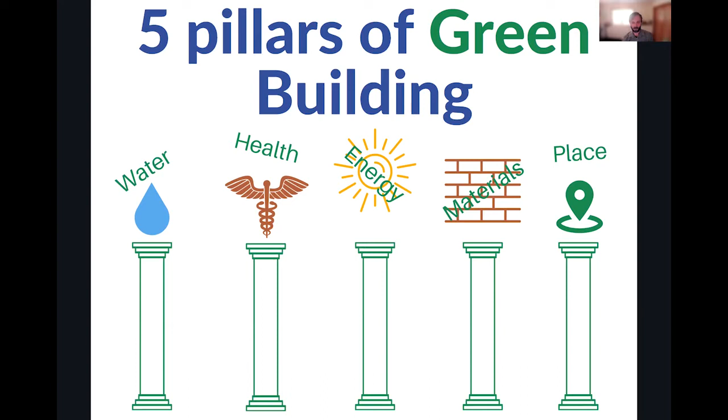So what we like to look at the Green Home Institute is what we call the 5 pillars of green building. All of our homes have these: energy, materials, place, health, and water. All of our homes do better in these areas and can be evaluated in all 5 of these areas and then be improved. For the focus of this competition, our main focus is on the energy pillar, with 2 side focuses on the health and water pillar as well, and ways to win within those.

So as you're going through our program, you'll see these themes emerge. So let's talk about the big one: energy.

That's where you're going to win the $500, right? Reminder: reduce your energy starting July 1 to December 31 compared to the same period in 2021.

If you reduce it the most, you're going to take home a $500 check. So one thing we like to think about for energy is what we call the home energy efficiency pyramid. At the bottom of the pyramid are cheaper, more do-it-yourself friendly options, but also less energy savings and less comfort. At the top of the pyramid, there are more energy savings, however they're more expensive, more costly, take more effort, and are probably less do-it-yourself friendly.

So I want to propose an exercise for you all. Take each of these items: water heater, solar, low-hanging fruit, awareness, understanding, insulate, HVAC, windows, appliances, air seal, and think on your own, take just a minute, and write it into the comment box listed from top to bottom.

At the top, list the bottom of the pyramid: cheaper, less energy efficient, more do-it-yourself friendly, all the way to the bottom: more expensive, but more energy savings. I just want you all to take a guess at what you think the order is, and then we're going to go through and see how right you were. Each one of these items is going to help you win.

Getting a sense of where your energy is being used in your house—there are devices out there you can plug into your electric panel. I highly encourage you all to go get these right now to help you win the challenge. It'll tell you where and when energy is being used in real time, so you can make more informed decisions on how to change it.

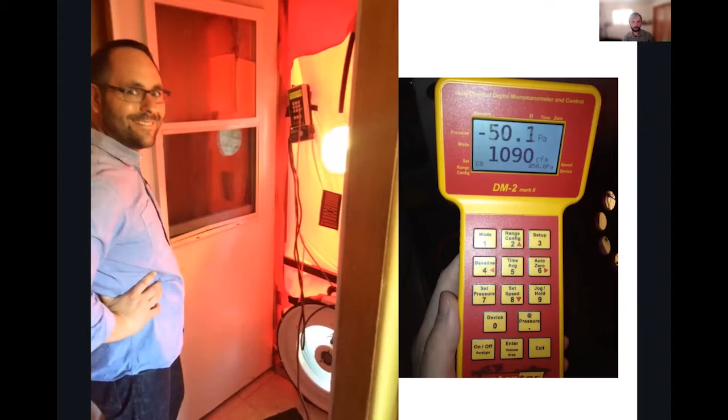Then you want to get an energy audit. Some of you are going to win the audit, some of you are going to pay for it, but let's get an energy audit done. If you're having income challenges, there are potentially free audits from the county, so we'll help you out with that too. Not here to judge or anything like that.

During the audit, someone comes in and does what's called a blower door test. That's a key number, because that blower door test tells you how leaky your home is, which is where a lot of energy is being lost. Plus it ties into rebates and other programs—that's a big component of the blower door test.

Also during the energy audit, the auditor takes a look at all these items and throws it into a home energy score application, which spits out a score from 1 to 10—1 being the worst performing home, 10 being the best performing home in Ann Arbor. Then it will say, if you make these improvements, there'll be a potential 10-year return on investment.

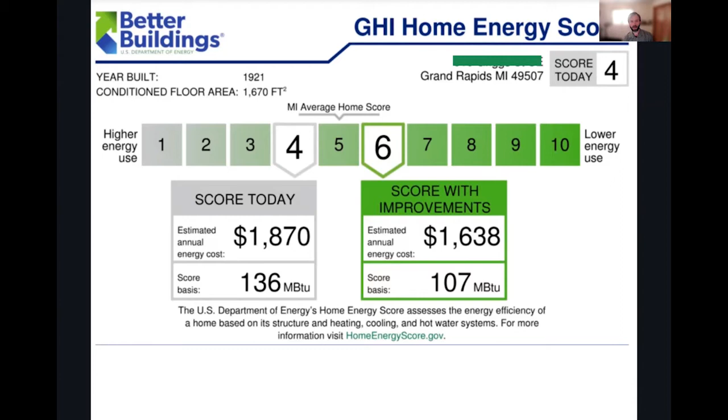You can also use this score to help make a reduction, win the competition, and get an improved score, which can have other benefits like home resale value—another way to win the competition. You'll take a look at some of the items that the Department of Energy's home energy score label will recommend.

It'll tell you when to replace something now, immediately, versus replace it later when it breaks—that won't help you win the competition, but maybe you don't want to spend money on something that still works. Your auditor will work with you on a full list of recommendations on what those improvements are.

You can also do the assessment yourself, though it won't be certified. The Department of Energy recently opened up a do-it-yourself tool, and I'm posting a link. We'll be doing a webinar on how to use that tool and do your own home self-assessment later this year as part of our Race to Zero series. I posted a link so you can go through and use it now to do your own home evaluation.

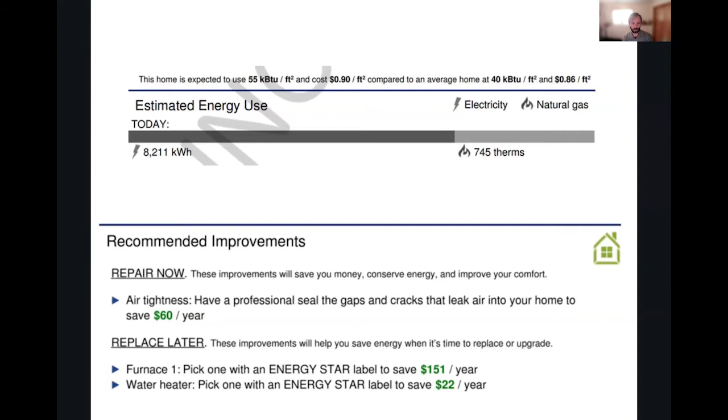Also, when you hire a heating and cooling contractor to improve your HVAC, be sure to tell them they need to use a certified Manual J version 8 heat load calculation, based on the blower door test you received from your home energy auditor. Otherwise, these contractors tend to oversize the heating system, which can be very expensive and doesn't work as efficiently.

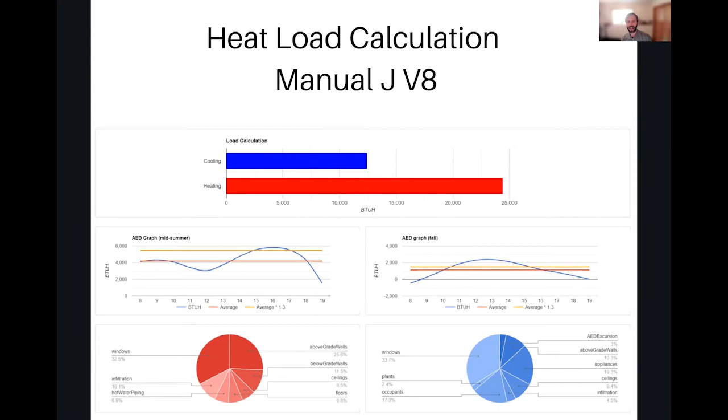So that's part of the awareness section. What did I miss? What are some other ways people can make themselves aware, that you could share with your fellow Ann Arbor residents? Or what questions do you have for me on the awareness section before we move further up the pyramid?

So there was one guest who shared that your library has cameras and sensors, and we're looking at potential indoor air quality sensors to get into libraries that you can all check out. There are some libraries, like in California, where you can rent cooking equipment. Who knows if we'll get to that, but we'll see other ways you can make your home more energy efficient.

Okay, so we're moving up the pyramid here. Here again are all the different items on it. What do you all think is the next one on our list?

Yes, low-hanging fruit. It's right there, right? So easy stuff: go and change your light bulbs. If you don't have all LEDs right now, you're wasting a lot of money. This is super do-it-yourself friendly, though sometimes depending on where your lights are there might be tall ladders you need to get to, and I understand the concern there, but get switched over to LEDs right now. If you don't have all LEDs, just leave this presentation now and go get them switched. You'll make a huge reduction.

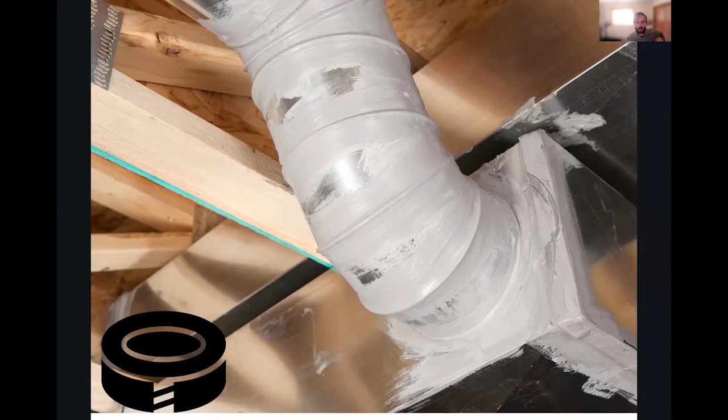Get downstairs and go take a look at your ducts. Do they look like this duct? Are they sealed? Do they have tape around them? If they don't, go get some metal sheet tape - not duct tape, you don't want to use duct tape, but tape that's for ducts - and wrap everything you can see all the way across the top. Sure, you can hire someone to do it, but if you feel comfortable, you can just wrap all the edges, or you can use mastic if you want. It will have a little off-gassing, maybe make you a little nauseous, not the healthiest to breathe, but it does seal a lot better than the tape as well.

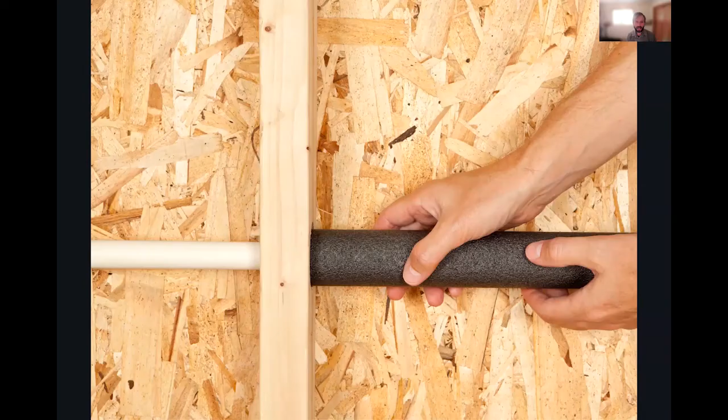Now get downstairs and make sure you have R4 pipe wrap around all your hot water pipes - wrap it and seal it as much as you can. I would put it around your cold water pipes too, if your basement's not conditioned. That's actually more for health and durability reasons, not for energy efficiency per se.

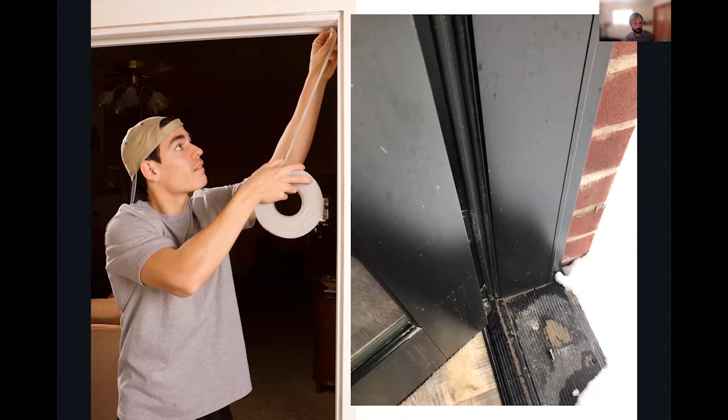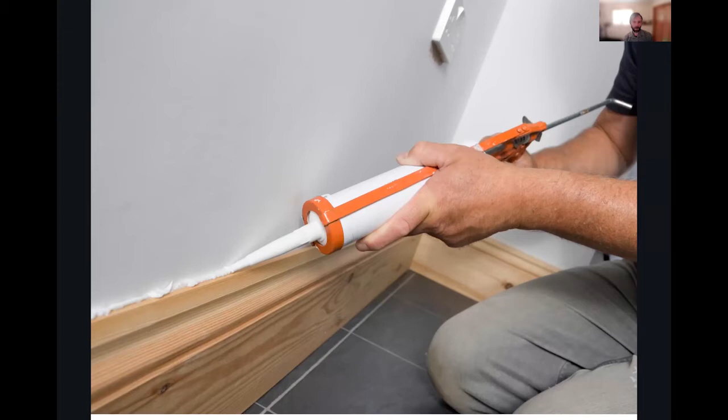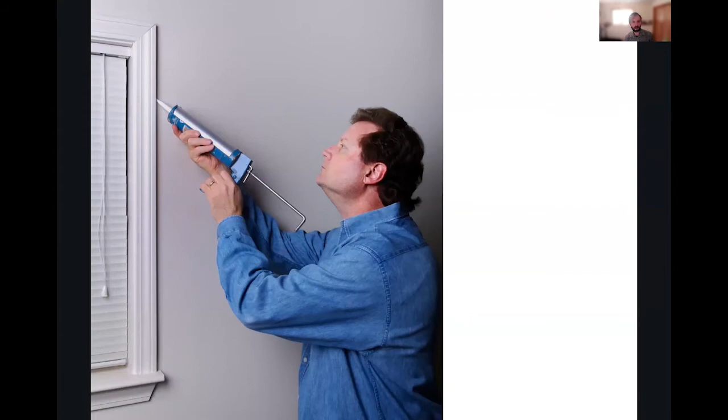Make sure you go in and weather strip all your doors and windows. Go pick up some weather stripping and check that it's still working, and get those repaired if not. Grab a caulk gun and start caulking all your baseboards. It's easier if you can pop the baseboard off and caulk at the bottom of the floor, but I understand that can be a pain, so you may not want to do that - you can just caulk on the top and the bottom. Same goes for all your windows - just caulk all the way around your windows while you're at it.

Get that in there. Light switches are notorious for leaking air, and they're a safety issue too, of course, for kids. So there are these cool light switches now where you can get them pre-sealed on the inside. If you've ever felt in older homes in the middle of winter, put your hand up near the power plug outlet - that is.

You'll feel cold air just blowing in like crazy, so make sure that's all sealed. They sell those, and make sure you don't just seal that part because it's actually blowing around the edges too. You got to seal it all.

Power strips, put everything on power strips and shut them off when you're not using them. I've had someone tell me they saved $70 a month by doing that. I assume they had a very high bill to start, maybe a million things plugged in. But also, one way to both reduce your exposure to electromagnetic frequencies as well as save energy is

to have a kill switch. The kill switch, you shut it off and it knocks the power out in the entire room. So you go to bed and just knock your entire entertainment center power off, shut the power off in your room if you don't use any power in there at night. It's just another way to cut some of that vampire power being used.

Then also try to keep the sun out from overheating your house as much as you can. So obviously you want to use blinds that are reflective. This is a little bit of a higher level, but you can get a white roof, a metal white roof, or if you're rebuilding your house, build it out so that it's keeping the sun from coming in the window and overheating the house.

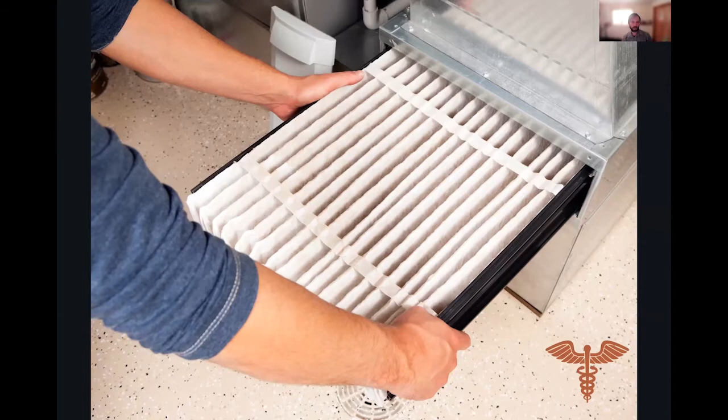Lastly, there's actually funding from DTE to do a test and tune-up of your furnace. It could include a filter change, making sure it's running properly. So if you're not getting a new one, have your HVAC contractor come in and they may pay for some of that to be done. It can just make sure your system is running more efficiently, and that can also improve the health and comfort in your house as well.

So before we move on to the next section, there's many other items for low-hanging fruit. I didn't cover them all here today. What are some things that you do or are planning to do in your house to save energy and win the competition? Or what questions do you have for me on some of the things we discussed for low-hanging fruit?

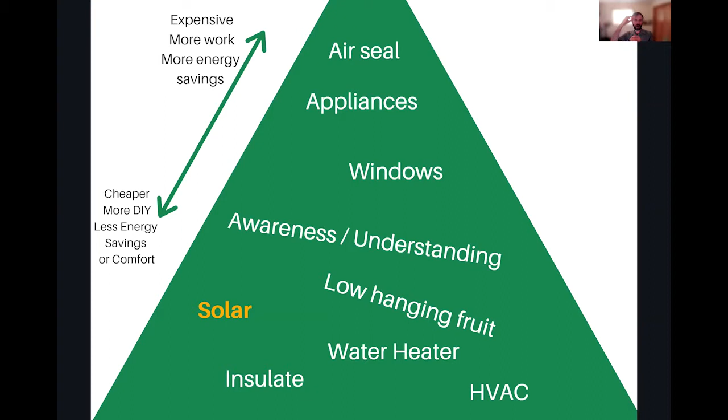All right, so coming up next on our list, again, we've got at the bottom awareness, education. Next up, low-hanging fruit. What's the third item we're going to be looking at that you had written down?

Anyway, what we have up next is appliances. And quite frankly, appliances—if you're not planning to replace them and you have ones you like, then this may not be high up on your list. But just from a pecking order, they're pretty easy to swap out, and a lot of the places will deliver those and install them.

So obviously you want to go after Energy Star certified. And if you go to the Energy Star website and you're a nerd like me, you can dig through it deeper and even find ones that are more energy efficient than the standard Energy Star label, just based on the efficiency of the appliance. So just make sure all of your appliances are certified Energy Star. If you want to be really aggressive when buying a new one, make sure they're at the tier 2 or tier 3 levels, since those save even more energy.

Right, so anytime you can get a new fridge, make sure of two things: have the freezer either on the top or the bottom, and get rid of the ice maker. Both of those things matter—when you have side-by-side fridges, they use more energy, and when you have ice makers, they tend to freeze up and leak anyway, using more energy doing all that. So if you're trying to be efficient, get the top-to-bottom style.

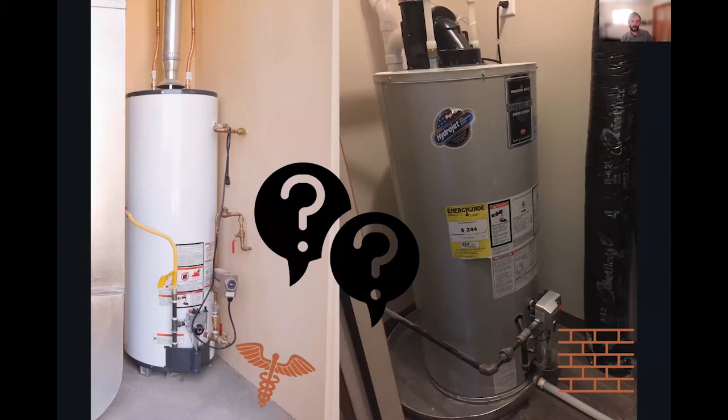Okay, so here's the challenge for you all. On the left side or right side, which is the most energy efficient water heater, and why? And bonus question, which one of these is going to be healthier? And then also a second bonus question, increase durability of materials, which we call the material section, the durability of your house. What do you all see there? And what are your thoughts? Left side better or right side better, and why?

Yeah, so on the left side, what you have is a naturally drafting gas water heater. And you can see that a little bit because you can see the gap there, which is a health issue, right? That could be pulling carbon monoxide and humidity up into your house. That's a health problem, but it's also showing that the unit itself is less energy efficient. So go down and look at your water heater after this webinar, and if you see that gap, you know it's time to update.

So what are the choices? Here on the right, you've got a sealed combustion water heater, probably Energy Star certified. It's just drafting that right out the window. And also this one's most likely going up a chimney, which is also inefficient. And those chimneys end up leaking when you've got a high snow load. It damages the chimney and causes leak repairs and mold issues. So there's a lot of wins by getting rid of the chimney and using a sealed combustion water heater that's Energy Star certified.

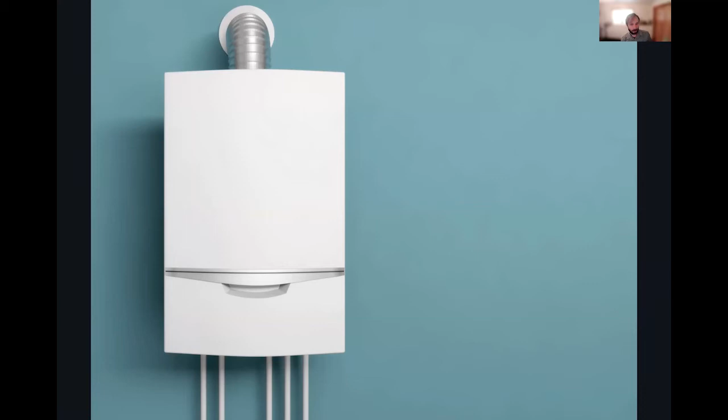You could also consider switching to a tankless water heater, but let me tell you a couple things about tankless. They're very expensive, hard to retrofit, can be very expensive. And water heating in general saves minimal energy to begin with, so it's a very big expense. Plus they have maintenance and upkeep, but it will be more energy efficient. I think 10 years ago tankless water heaters were the green dream, but I think they're definitely on their way out.

So what is the future? Well, the future of water heating to be the most efficient is to go all electric. And going all electric does come with health benefits, again, you don't have those emissions coming straight out of the water heater. But electricity is very expensive right now, even with prices going up and inflation of gas, which has gone up I think 300%, electricity is still pretty expensive. So just going straight to an electric water heater could be costly.

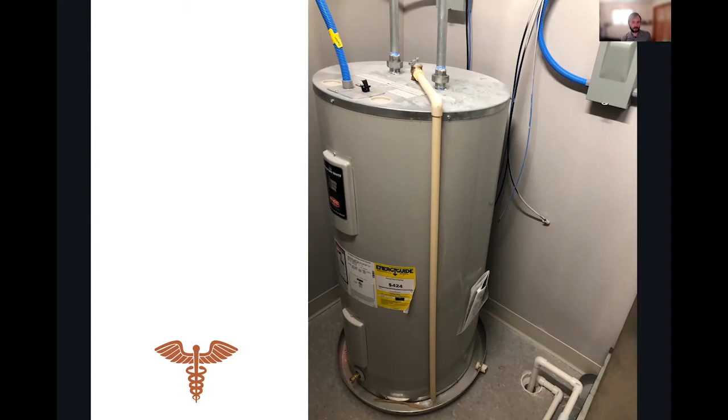And that's why they make things like heat pump water heaters, and I have one of these. What these do is they pull heat out of the air. And I can tell you there's even heat in your house in the middle of winter. It uses a refrigerant, kind of like an air conditioner or your refrigerator, to heat that water up to roughly even 400% energy efficiency. And it just makes for a much more energy efficient situation.

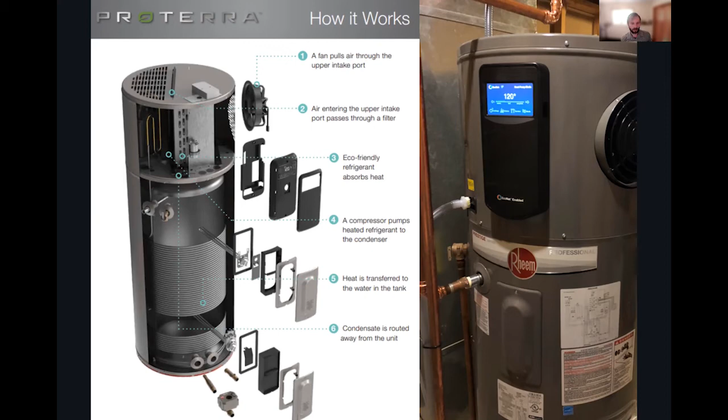So there's a quick video here about a really cool brand that we like. Let me know if you all can't hear that.

Introducing the new Rheem hybrid electric water heater.

Can you guys hear that?

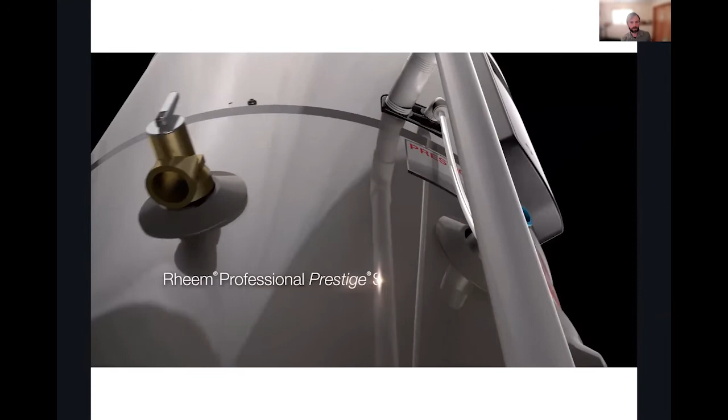Factor of 3.5. This is the smartest and most efficient water heater on the market today. It's the quietest hybrid on the market at 49 decibels. Plus, our newest hybrid design is EcoNet enabled, providing Wi-Fi connected control both at home and away.

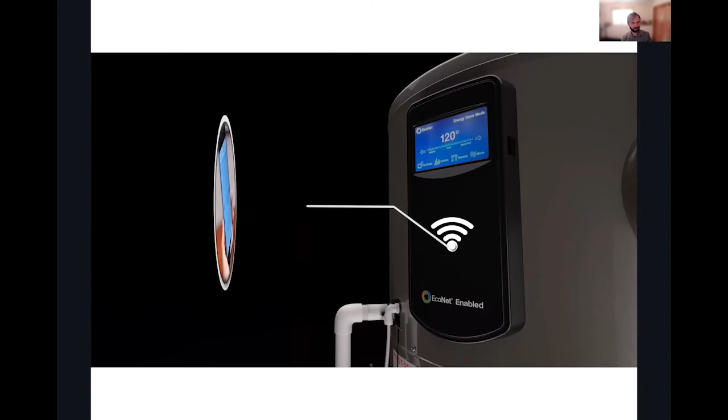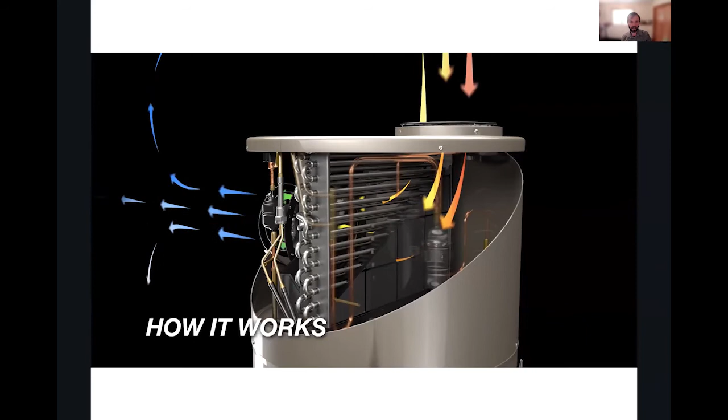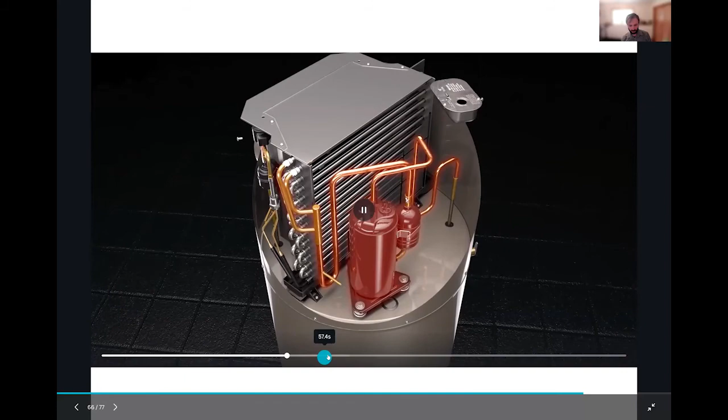Here's how it works. A fan pulls in heat from the outside air, and it's using it to heat the water at super high energy efficiency. Then, from there, it's putting it through a refrigerant cycle to heat the water.

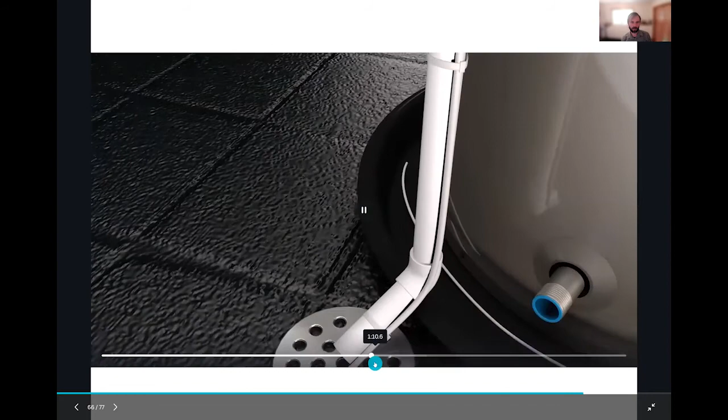So that's heating the tank. It's wrapped around the tank there. And then there is a condensation line just to make sure that when it's pulling that heat out of the air, water comes with it. So you've got to make sure to drain that out. It's a little bit different than other water heaters like that.

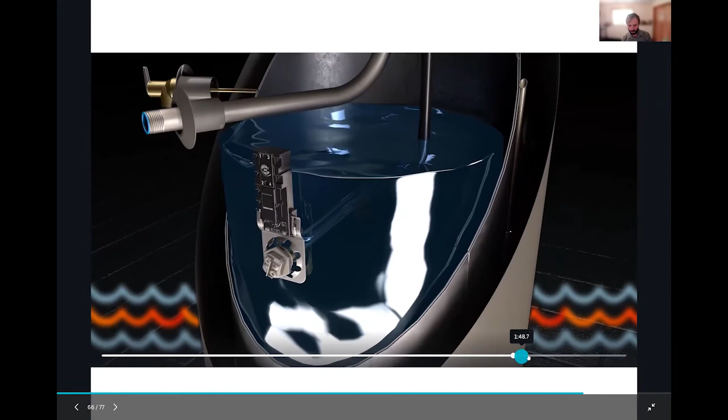So it's a pretty cool product, and there's a lot of different brands. There's even one made right here in Michigan that can do that.

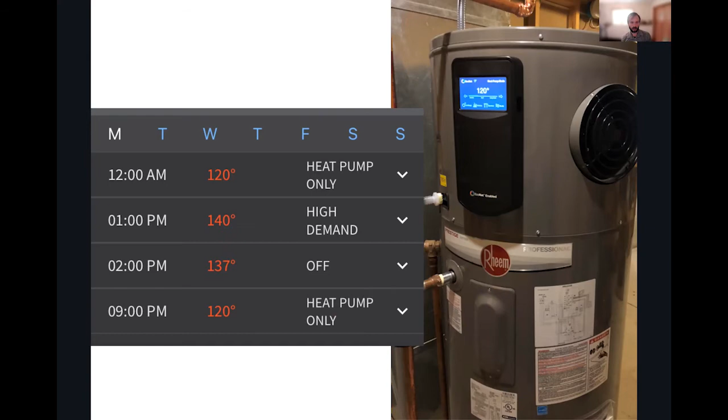Another thing about these devices is that some of these come with time of use settings right away. So you can actually set your water heater to not heat when electricity rates are higher, and only to heat when electricity rates are lower. In that way, it actually makes your water heater kind of act like a battery. There's utility programs around the country that are using water heaters like batteries to help reduce the load on the grid.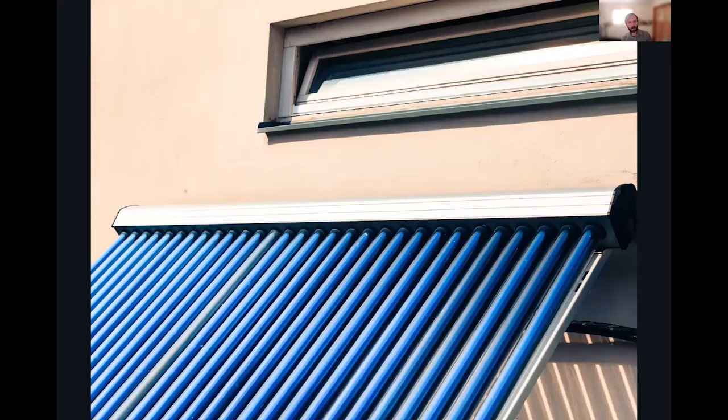Some people ask about solar hot water, and it's really something that's on its way out. It's pretty much a way of heating water that's kind of gone. Part of the reason is because if you overgenerate solar hot water, you have a problem on your hands with all this extra hot water you need to do something with. Plus, there's all the plumbing and other mess with that. So we just don't even see anyone doing that anymore, but wanted to give you a heads up.

So like I said, another way to win this competition is to reduce water usage. By reducing water usage, in many ways you're going to reduce energy usage in many of the applications tied directly to the water heater. So it's a 2-for-1 if you really think about it. And there's an extra way to win.

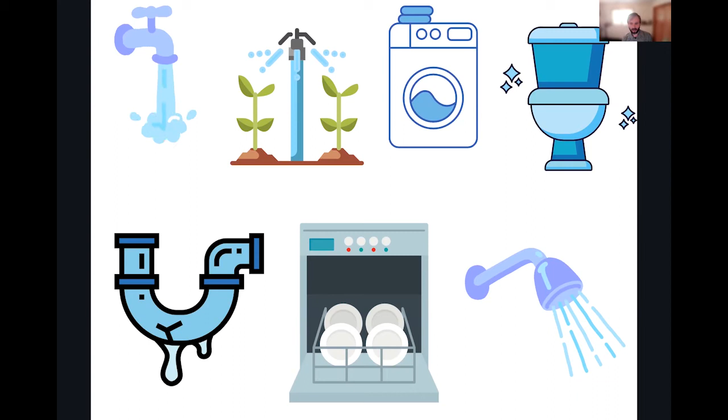We've got all these different applications in a home, and I was going to do a little challenge, but we're running short on time. So I'm just going to tell you, toilets are the number one water users completely. It's just a simple flush, you don't even think about it, but it uses so much water. Imagine if we could cut our water usage down to like 0.8 gallons per flush, even 0.5 gallons per flush. That's what I have. The average is 1.6 gallons, low flow is called 1.28. But imagine if we could go even lower and put less strain on the city municipal water system.

That doesn't save you any energy, but it sure saves a lot of water. And water bills are only going up so fast, exponentially, in cities. So let's save water, just to save you some money.

Next up is shower heads. You want to get those down to 1.25 gallons per minute to be aggressive. I have one, can't even tell the difference, as long as your water pressure is good, feels great. Bathroom aerators, you want to get those down to 0.5 gallons per minute. Again, that'll save water, and both of these will save on hot energy and water.

Then next up is your clothes washer, for how much water is being used. So switch again to Energy Star front load.

Leaks: when your assessor's out doing your evaluation, make sure they assess your house for water leakage. An easy way to do that is to turn off your water at the spigot where it's coming into the house from the municipality, then don't use any water for about a half hour to an hour, and see if it moves. If it does, you might have a leak.

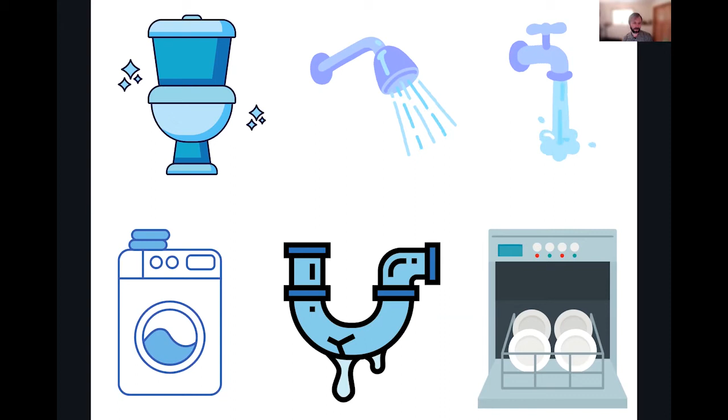That's a very debatable thing, but again, this won't save any energy. If we can transform our yard into drought tolerant native adaptive grasses, they make grasses that look just like your average lawn. I've seen it with my own eyes in Illinois, it's called Black Beauty grass, I believe. This grass only needs to be mowed maybe once or twice a summer and barely uses any water once it's established. Buffalo grass, Zoysia grass are other options. For your plantings, make sure you're using native adaptive plantings that are drought tolerant, and get rid of the irrigation. That's another way you can cut your water use and help win the competition.

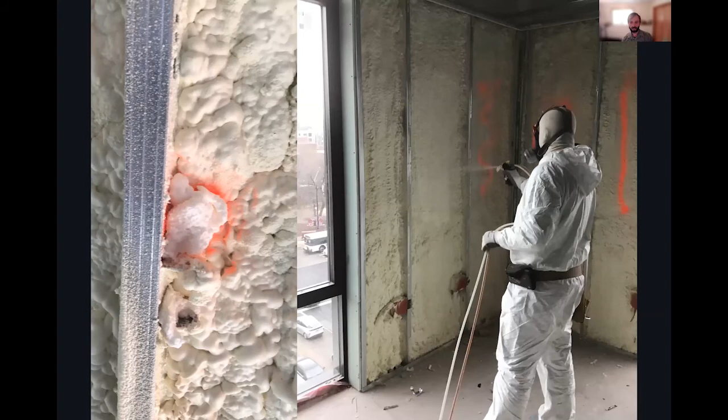I'm going to skip the questions for water because we've got a lot to cover in a short time, and get into the next session, which I'm going to pull up on another screen. Any guesses on what that might be?

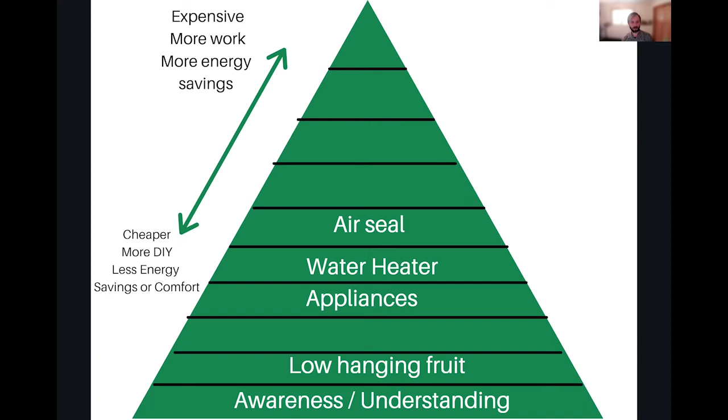Air sealing, yep, you got it right. So that's going to be next. This really goes hand in hand with insulation. They can be hard to separate, but sometimes you need to do one without the other. We have all these areas in our home from top to bottom where air is going to enter in, and it's going to waste tons of energy and, most importantly, make you feel very uncomfortable.

Some of the areas you'll probably be able to access that are more affordable is what we call the rim band joist, where the basement comes together with the first floor, and you'll be able to go down in your basement and see it. The attic is usually going to be much more accessible. The walls are going to be very difficult to get to unless you're planning a more deep renovation and retrofit.

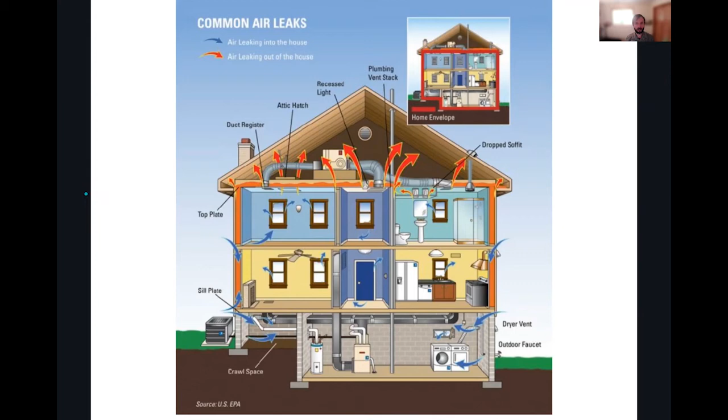So again, you can go out and get the caulk gun and go around and caulk air leaks. When your auditor comes and does blower door testing, they should hopefully flag for you where this leakage is happening. And then you can hire someone like Eco Intelligence to come through and do that air sealing for you.

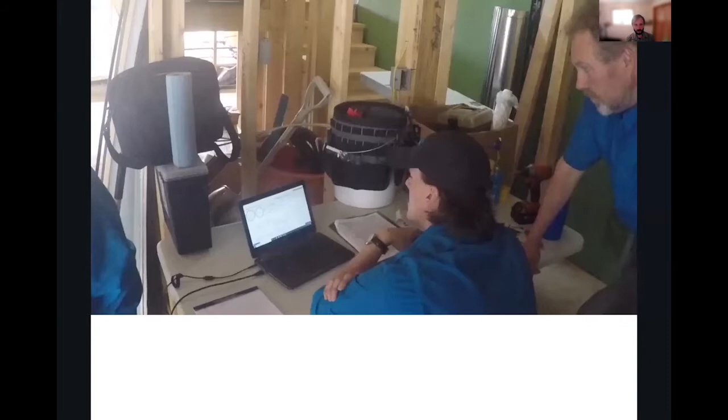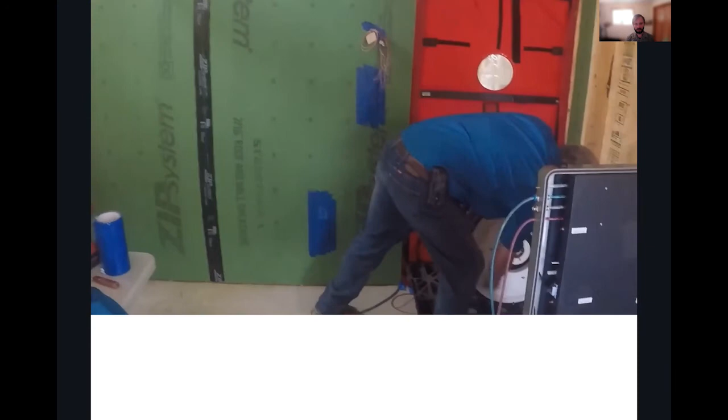If you really want to go to a higher level, here's an Ann Arbor net zero home where they're actually going in and doing a sealant in the house that goes through and air seals the entire house. While they're doing it, they're using a blower door test to see how efficient their air sealing is. This is a new construction home. They set up this sealant and it's blowing air seal all over the place.

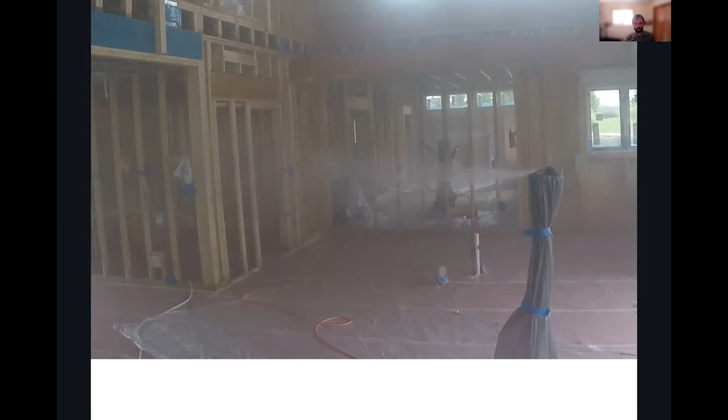But you can do this to existing homes too. You're just going to need to get your furniture moved out of each room and then tape everything down. But if you really want to be aggressive on air sealing, this is the way to do it. We don't see too many people do it on existing homes because it's very messy. But again, if you want to be aggressive and you want to win, you might want to do this.

We have a whole webinar on this, a two-part series called Sealing the Deal, Innovations in Air Sealing, and you can check that out over on our YouTube channel. Any questions or thoughts there on air sealing in general?

Typically, like I said, it goes hand in hand with insulation, so we're going to talk about it later when we get to insulation. And I appreciate you saying that. If you've got can lights up in your attic and they're penetrating into the attic, that is a huge leaky spot. So the first thing is never install can lights, that's number one. If they are there, get rid of them, that's number two. If you like them and you're not going to get rid of them, they can be sealed. I believe Amanda's team can help out with that too. There are ways to seal them or do them properly if you like them up there. That is a huge area for leaks and water leaks and all that other stuff. So I'm glad you brought that up, thanks - that's one I forgot to mention.

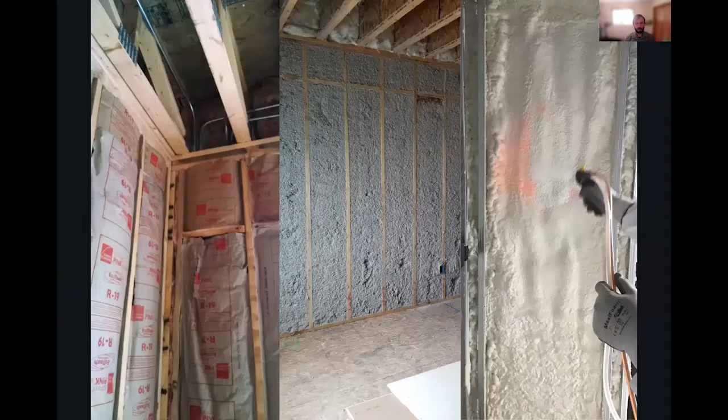All right, so what's next on our list here after air sealing?

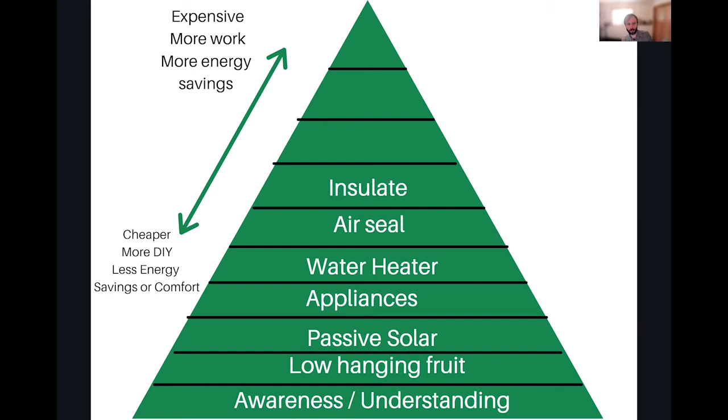So insulation, and again, this goes hand in hand with air sealing, but typically is a lot more expensive and a little more labor. You have all these sections around your house that you can insulate.

Right now, you can go down into your basement, look down, and see your rim band joist, and see where the basement touches the floor, if it's insulated or not, and get a sense if you need help. You might have a unique situation with your attic, which can make insulation more challenging. But you can poke your head up into your attic, get a measuring stick out, and see what kind of insulation is up there, and how thick it is.

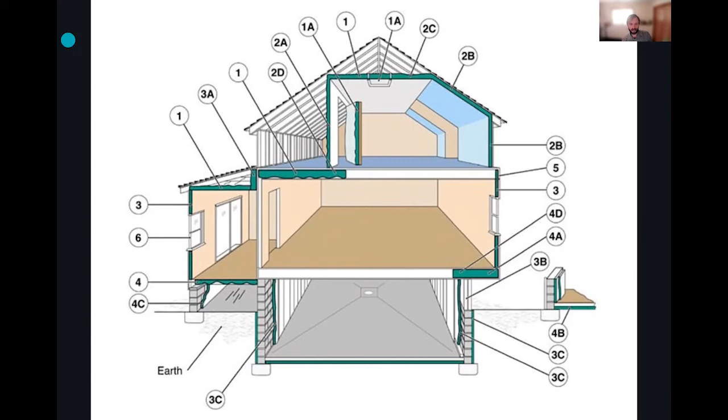What you're looking for is either fiberglass, the pink fluffy stuff, or the gray fluffy stuff, which is cellulose, or spray foam. These are a good, better, best from our value. On the left, fiberglass is the least effective insulation, especially in a batt form like this. Very ineffective, very leaky. You probably have it in your walls.

Cellulose is your second best. From a resistance to heat loss standpoint, it does a pretty good job. And typically, if it's blown in nicely like this, it air seals a little bit better. Foam, on the other hand, is going to be your best air sealant, your most effective resistance to heat loss, and it has potential opportunities to block moisture, though it also has potential opportunities to cause moisture damage. So it can go either way.

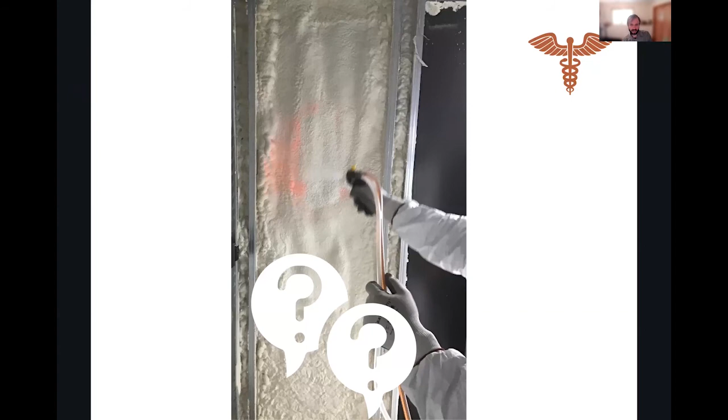One thing we do get concerned about—remember, you can win this competition by having better indoor air quality in your home—is off-gassing from foam. Foam, at the end of the day, is a petrochemical made out of oil, and it can off-gas. There are some studies showing that, especially if it's installed poorly, it could cause potential negative air quality. Could that cause health issues? We just don't know. So from a health standpoint, blown-in fiberglass is actually your healthiest insulation, especially if it's certified.

We want to do this session because we want you to consider both health and energy efficiency when you're doing your project, and make sure you're thinking through all the applications.

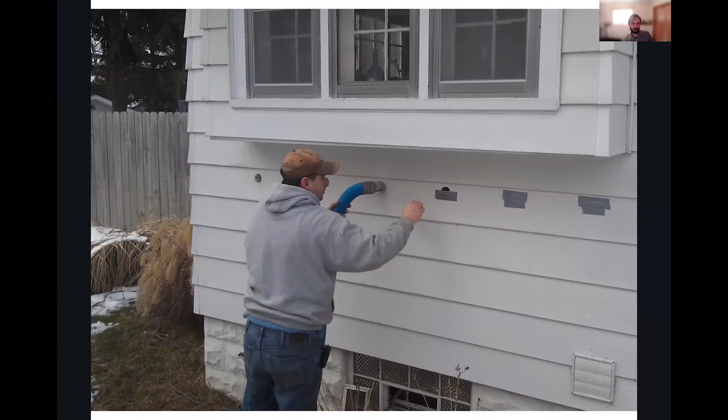If you have an existing home, there's something called a drill and fill method. If the walls are empty, you can blow in cellulose. Some people pour in place foam into the walls. This can cause potential durability issues if the home has poor water leakage management at the top, which can cause other problems. So just be careful that you've taken care of the water issues around your house, so they don't get in and rot the blown-in cellulose if you decide to take this method.

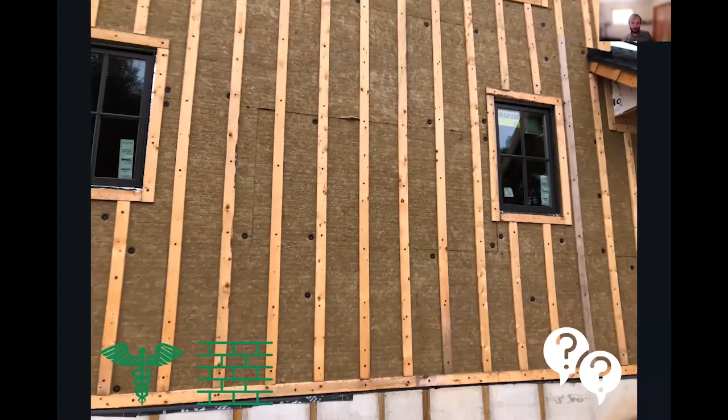A very energy efficient strategy would be to remove the exterior siding and put on something like a rigid foam or rigid rock wool that wraps around the house. This can be an air barrier to some extent if done right, and it can keep a lot of the heat in. Plus, the studs in your house that hold it up waste a lot of energy, so this helps block that wasted energy within the studs. Very expensive to do, but if you want to be a winner, this is a great opportunity to win, save energy, and make your home more durable in the long run.

So before we move on to the next section, are there any questions on this one?

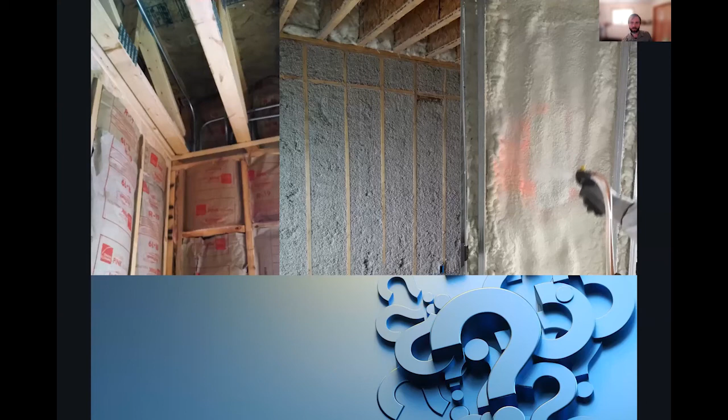All right, so the next one is just being given away because I forgot to put the question in there. But heating, cooling, ventilation—this is one where you might say, Brett, my air conditioning is failing, my heating system is failing. If that's the case, then this is going to be at the top of your list. You still want to get the energy audit done before you replace your heating system. Definitely don't want to do the wrong one. But this may be your top priority.

Quite frankly, if we can take our systems all electric, we can actually save a lot of energy right out of the gate, just by switching to electricity and using heat pump systems, which we'll talk briefly about. So in fairness to you, you should do all these other things first, but they can be overwhelming and costly with prices going up. You might have a failing HVAC system where that is your priority, and I get that.

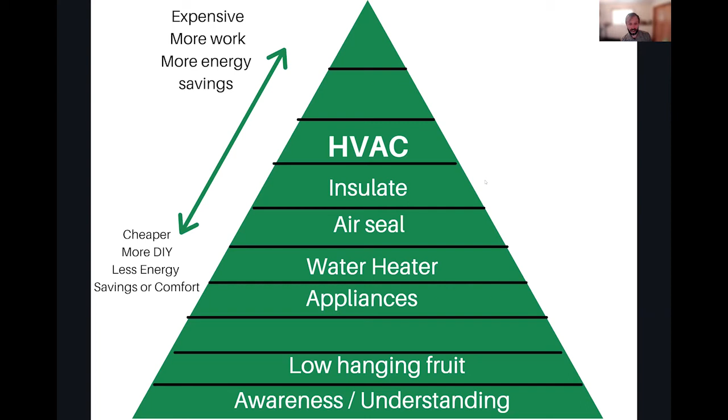When people tell me, 'Oh, I got a new furnace, it runs all the time, it's so inefficient'—no. If your furnace turns on, fires up, turns off, cycles over and over, you hear that in the winter real loud and then it's off, that's bad, very inefficient. You don't want that. You want it running 100% all the time, constantly, as much as you can. That means it's properly sized and right sized.

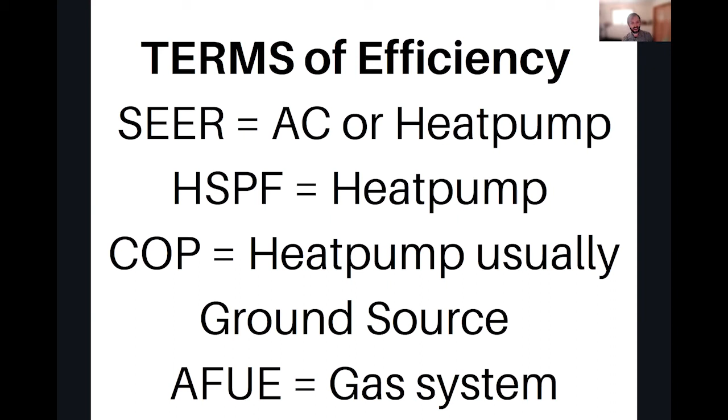Here's some terms to look at that you might hear me say. SEER, which is an AC or heat pump rating. HSPF is a heat pump rating. COP is a heat pump rating, usually used for geothermal. And then AFUE is a gas system rating.

For air conditioning, you want your air conditioning to have the highest SEER rating it possibly can, and you want it to be right sized, because that also helps draw humidity outside of your house, which can cause all sorts of health issues and mold issues.

Now, if you have a gas furnace that you really like and don't want to switch to an electric heat pump, that's fine. There are new products, like from our friends at Mitsubishi, where you can use a heat pump just like an outdoor air conditioning system, and plug it into your existing gas furnace. What it does is act as air conditioning in the summer, and in the wintertime it pulls heat out of the air until the air gets too cold, and then your gas system fires up from there.

We have a whole webinar on these ideas you can check out on our website called 'Heat Pumps and Gas: Cold Climate Hybrid Systems Are Here.' And if you want to go all heat pump systems, that's the best way to go—just make sure it's a cold weather climate certified heat pump system, which we can get you more information on.

Now, the most energy efficient system you'll ever find is ground source heat pumps. That's a geothermal system where they drill wells. There are a lot of challenges, especially in Ann Arbor we've heard, where you're not allowed to drill wells next to certain lot lines, so there can be difficulty just being allowed to drill these wells. But if you can do it, that's going to be the most energy efficient system you have.

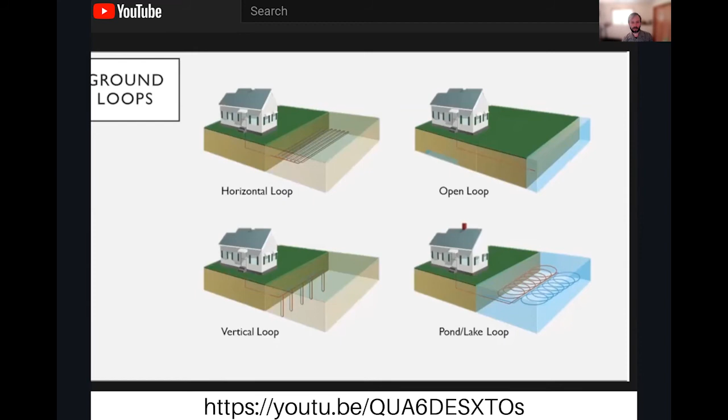One thing we're all jealous of over here is that DTE actually has a special geothermal rate just for you, to charge less for electricity for your geothermal usage. So you get a bit of a head start by using geothermal and going through that special rate.

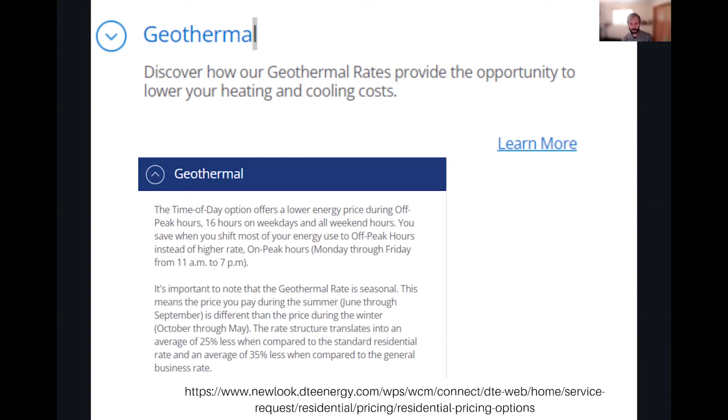I'm going to skip a couple things here to get into the air quality section before we wrap up. One of the ways you can win this competition is to improve the air quality of your home, and that's closely tied to your HVAC systems.

So what you're going to do is get a device, an air quality sensing device—we'll have more information, maybe even a sponsor who gives them out—and put this device in your house for at least two weeks. If you want to own one, we recommend you just own one. Think of it like a smoke detector or carbon monoxide detector, but instead it's constantly monitoring air quality. Usually it's not bad enough to tell you to evacuate like smoke or carbon monoxide, but it's constantly monitoring air quality in your home and telling you over time what kind of pollution you're being exposed to, so you can think about what you should do to remove it.

So these air quality sensors are measuring things like radon, which is a problem in Ann Arbor — you're in a high radon zone, and that's linked to lung cancer. Also VOCs, volatile organic compounds, and CO2, which is a problem, especially if you work from home. If it's really high, you're tired, groggy, not getting work done, and the flip side is you don't sleep well when CO2 is high. It's measuring humidity, temperature, pressure, and PM 2.5, which comes from gas stoves and can cause asthma, allergies, and also comes from wildfire smoke. Every time there's more fires out in California, that's getting sucked into your house. So it's measuring all this stuff.

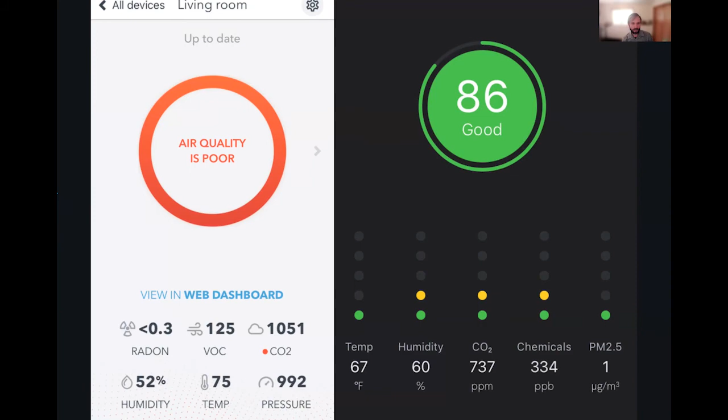Now, what can be done to improve air quality? Well first, I want you all to go do the toilet paper test on your bath fan. Hold up a piece of toilet paper and put it on your bath fan — does it hold the piece of toilet paper? That's telling you your bath fan is probably functioning pretty good, and that's a good sign that you've got good air movement. So then you can just flip your bath fan on and leave it running all the time, and it's going to get good airflow in your house as a quick, cheap way until you can do further things.

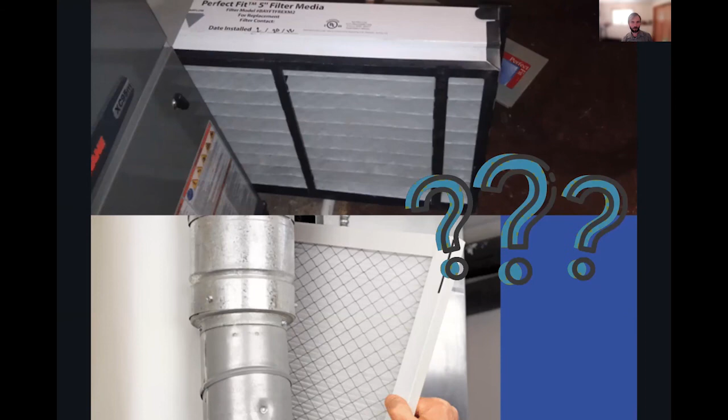The next thing you want to do is get a good MERV filter, at least MERV 8, but you can upgrade to MERV 13 if you want to filter out some of that PM 2.5. It even starts filtering out potential airborne viruses and all that. But you've got to be careful when you upgrade your MERV filter, because a too-thick MERV filter can damage older HVAC systems, so you want to work with your HVAC contractor.

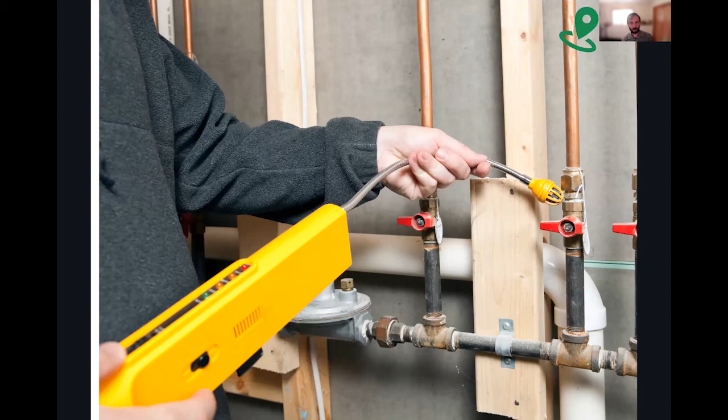Again, you want to do gas leak inspections in your house. We find gas leaks all over homes we inspect, even on brand new HVAC systems — they're leaking all over. And the gas stoves are leaking all sorts of nasty stuff that you don't even see, causing all sorts of problems.

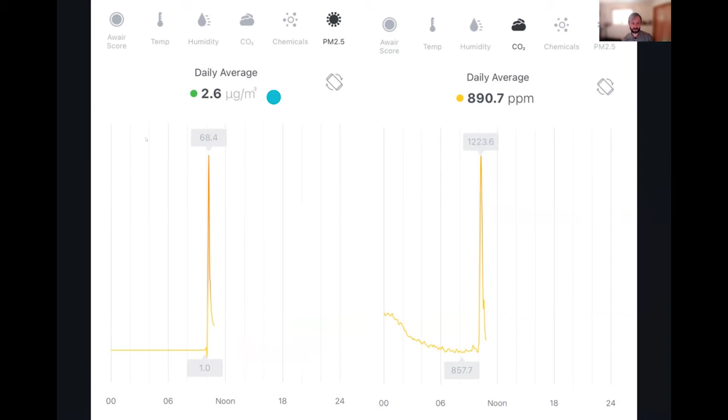Here's one of the people we work with — you can see when they turn their gas stove on, on the left there, their PM 2.5 fires up. Remember, that's asthma, childhood asthma, and all sorts of other cardiovascular diseases. Then it also fires up CO2 — real nasty stuff coming out of there. And their gas stove is in good working order.

So again, you want to switch to electric and induction to have a healthier home. And then next, you want to make sure your home has a hood range, and that the hood range is venting outside. Very important to make sure you've got good air quality within your house.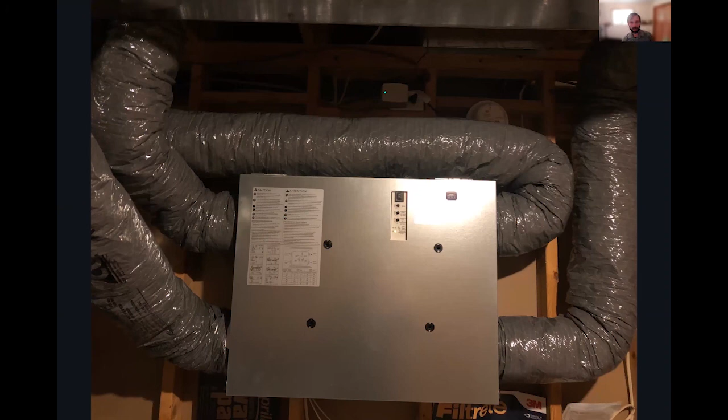Some other strategies to make your house more healthy: putting in an energy recovery ventilator, making sure fresh air is coming in, dirty air is going out, and it's doing it in an energy efficient way where it captures some of that waste heat, especially in the dead of winter or the heat of summer, so it's not bringing in all that extra heat or cold air. That's something you might want to do if you make your house super tight.

You hire Amanda to come out and make your house really tight, then you want to put in this energy recovery ventilator, and then you're going to get it tested just to make sure — you're going to test your ventilation systems to make sure they're actually working properly. And then lastly, we're looking at smart ventilation systems, which can actually detect that air quality is bad, and then turn your ventilation systems on when they detect a pollution event in your house — they're a little bit smarter. That's really the highest level of air quality.

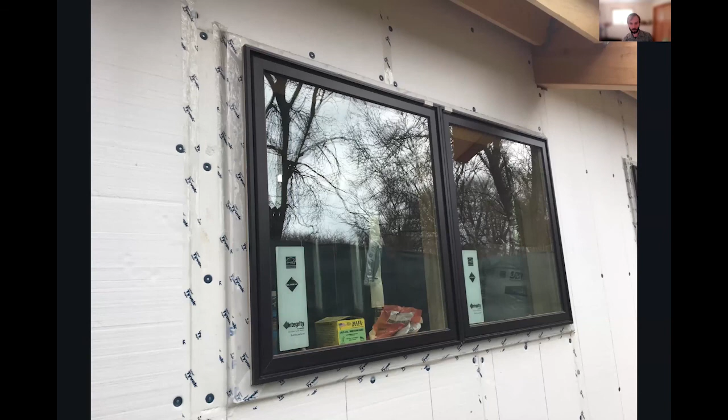I've got to get going and wrap this session up. So I just want to let you know, windows are a very expensive way to save very little energy, and so we just don't see people replacing windows just to save energy.

We see people attempt to replace windows just to save energy, but unfortunately, that's a very expensive way to do it. It's one of the last things you want to do. The only reason to replace windows is if there's an aesthetic problem with them. Then that's a good reason to replace it, and yes, it will save energy, but it's a very expensive way to do it.

So instead we encourage you to repair windows, reseal, reputty, rebuild, add storm windows on the outside if you want to, or try something brand new: build-to-order, do-it-yourself installation storm windows from our friends over at Indow Windows. You can measure your own windows and then pop them right in on the inside.

That's going to increase the performance of the house, with a potential 10% reduction in air leakage on a house-by-house basis just from doing these types of windows. We have a whole webinar on our website too about doing that, and how, and what those products are.

If you are getting new windows, make sure to look at the lowest U-factor you can find and consider the solar heat gain coefficient. The lower the heat gain coefficient, the lower the heat that comes in. So if a window is exposed to the sun in the summertime, you want a lower heat gain coefficient so as not to overheat your home.